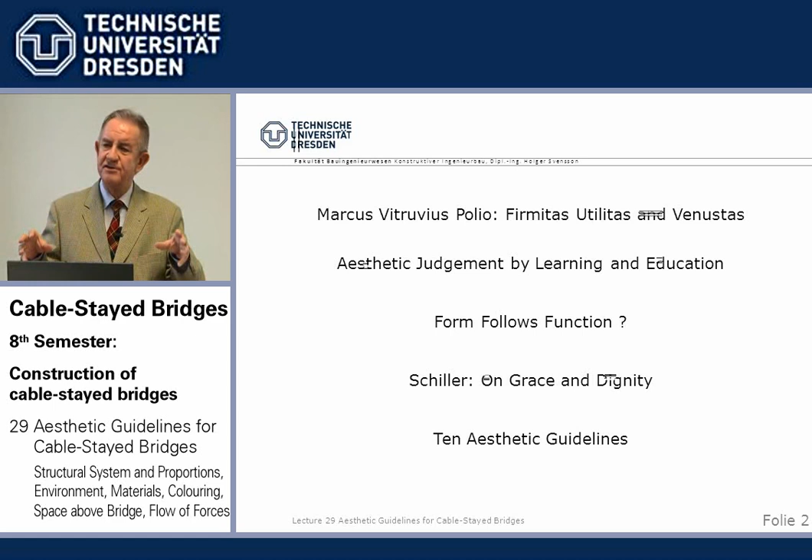And he comes to the conclusion that a beautiful structure has to fulfill rational requirements, form follows function, as well as more felt requirements. So I like to say he combines the two considerations on a higher level dialectically. This is, I think, the answer. It must be rational and it has to fulfill some requirements from feel.

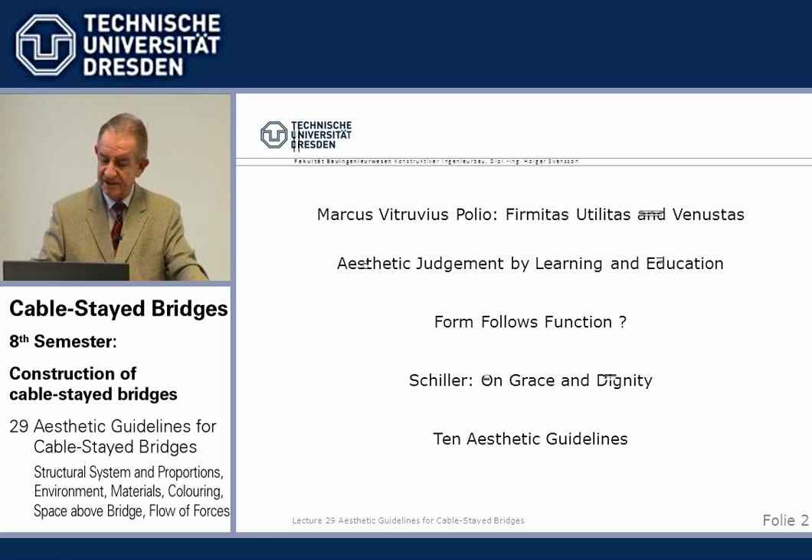We will today deal with the rational requirements, and for that purpose I have developed, or summarized, 10 aesthetic guidelines which can be used to judge a structure. It's not a recipe like a cooking recipe - thou shalt apply these rules and then you will reach a beautiful structure. No way, this can't be done.

But it can be helpful if you're sitting with a design, or looking at another design, to have a way to check various points, whether they are fulfilled. And by constantly looking and judging structures - that is what I call learning aesthetics, by being aware of what is beautiful and what is not, and why. So these 10 guidelines, from clear structural system to, I always say above all, simplicity, we will now go through with examples.

A clear structural system is a requirement so that even a person uneducated in structural engineering, when he looks onto a structure, feels there is a right flow of forces, or a layman also has a fine feeling if there is a wrong flow of forces.

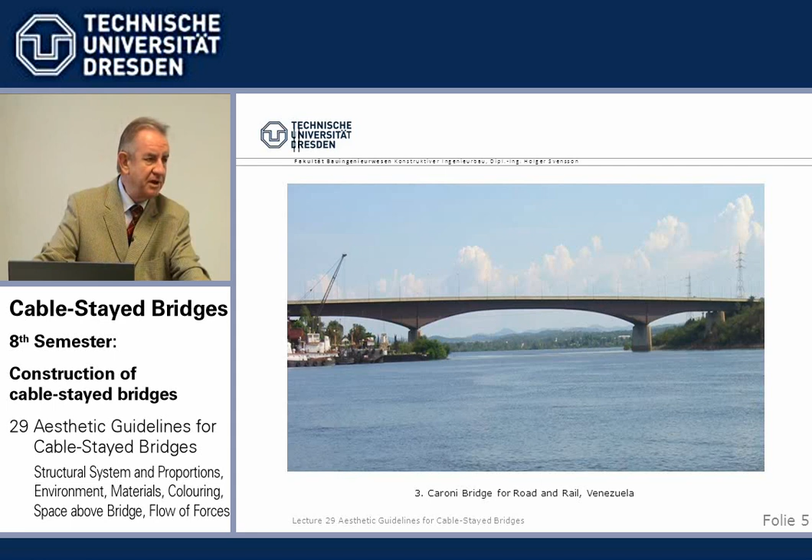So a clear structural system - we start with a continuous girder, deeply haunched. This is for road and rail, and it's very clear how the loads are transferred by bending, and where the biggest bending moments are, over the piers, there is the greatest depth, most material.

An arch also gives a clear impression. Here we see this is a fixed arch between rock slopes, and that's where the force is transferred, and a light roadway is hung from this load-bearing arch.

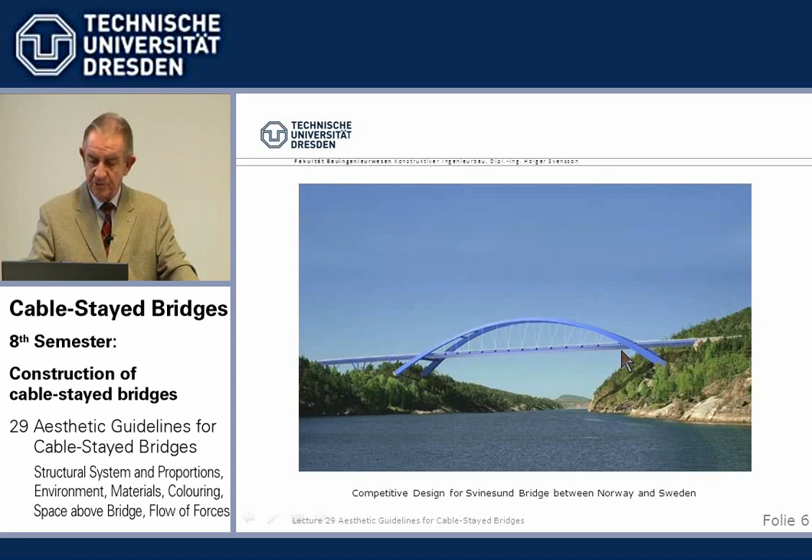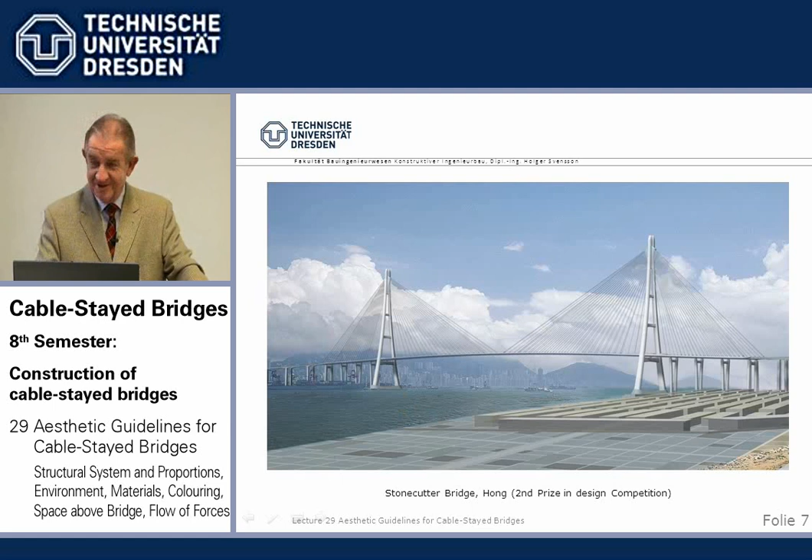A cable-stayed bridge shows a clear system. We have a light beam hung up by towers, and the connection is done by cables. This, by the way, is a second prize for the stonecutter we did - we didn't win, we were runner-up, but it still hurts. I think it's a beautiful bridge we designed there.

Of course, for simplicity, a suspension bridge cannot be beaten. The towers have what I call the washing line type - main cables hang over, and the hangers and the beam. For clarity of structural system, you can't beat it.

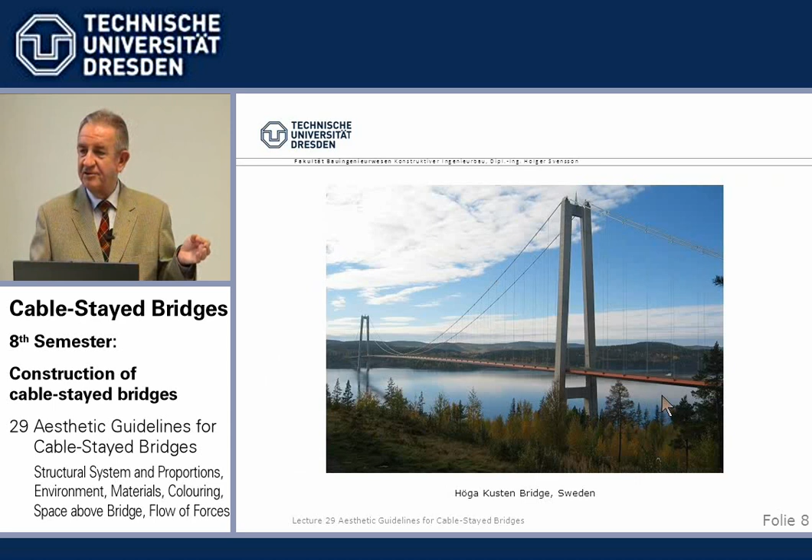The depth ratio above the piers and in the center should be close to 2 to 1. The second rule is that the depth of the beam in the center and at the end should be the same, and it should run horizontally, as a tangent, with the underside parallel to the top into the end structure. If you follow these rules—2 to 1, same depth, and ending up parallel—you will nearly always design a good looking haunched girder.

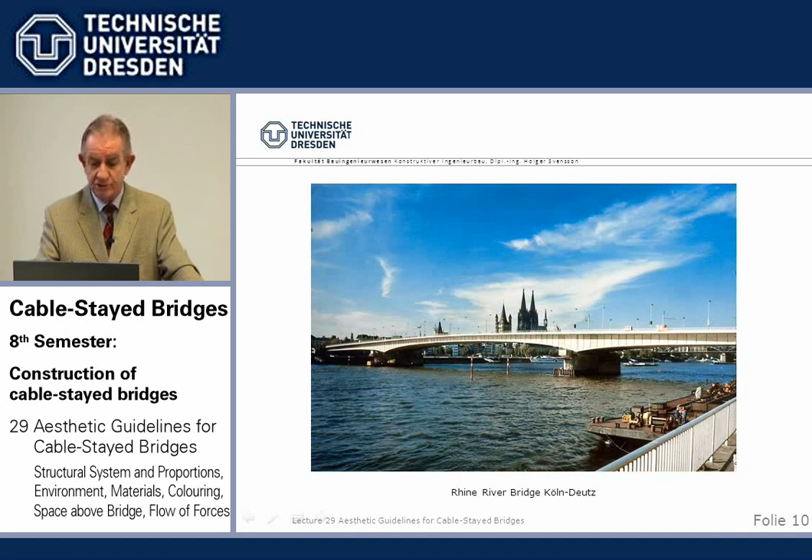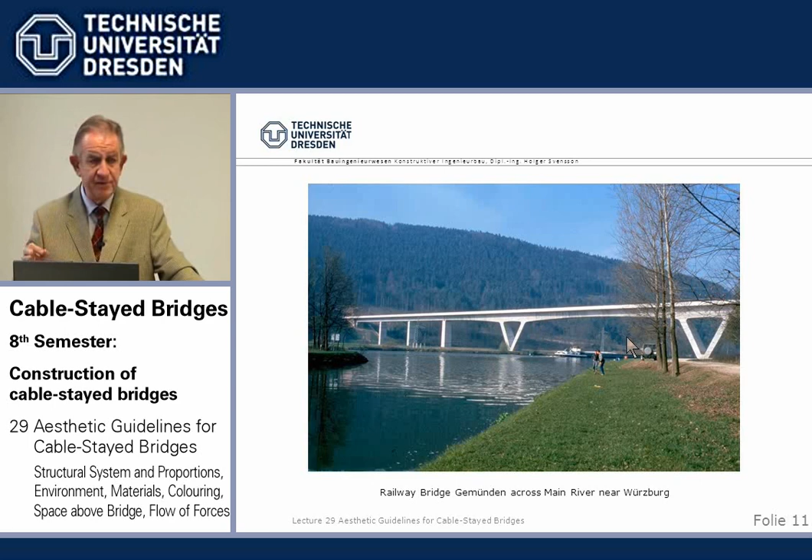An arch bridge also has simple base rules. Again we have the rule of 2 to 1: the ratio between the arch depth and the beam depth should be 2 to 1, or 1 to 2—it doesn't matter.

It can be the other way around—you can have a heavy arch which carries the bending stiffness, with a light roadway slab just hung to it. Then the arch has 2 and the beam has 1. But you must not use the same depth for the arch and the beam; 1 and 1 looks dull. You need a certain contrast inside the structure, so never make it 1 and 1—always 2 and 1, one way or the other.

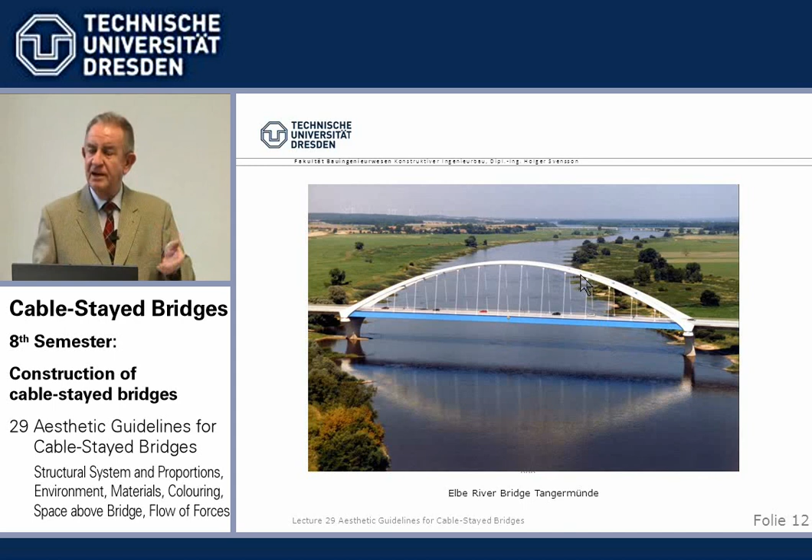Color can also help here: a dark color underlines the thickness of the beam, while a light color highlights the slenderness of the arch.

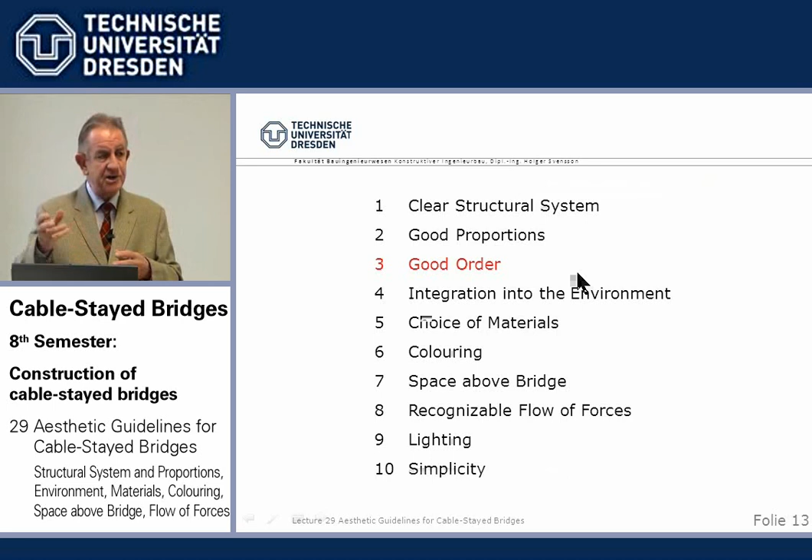Next rule, good order—very important. We must minimize the different directions of members in a structure to a minimum. Good order.

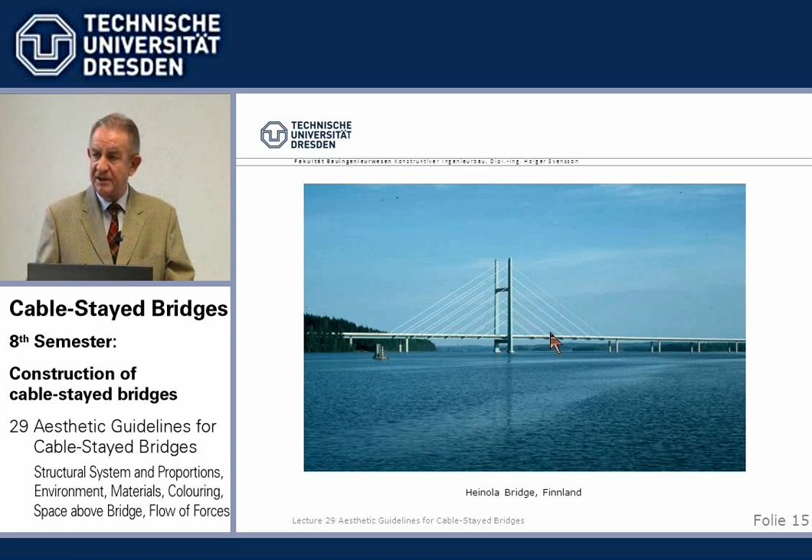This can easily be demonstrated in the arrangement of stay cables for cable-stayed bridges. The simplest way is the harp system, with cables in parallel. With only one center plane, there are no intersections at all—the simplest arrangement of stay cables you can have. Even with two cable planes in a harp arrangement, there are no visual intersections even when viewed skew from an angle. That's the big advantage of the harp arrangement.

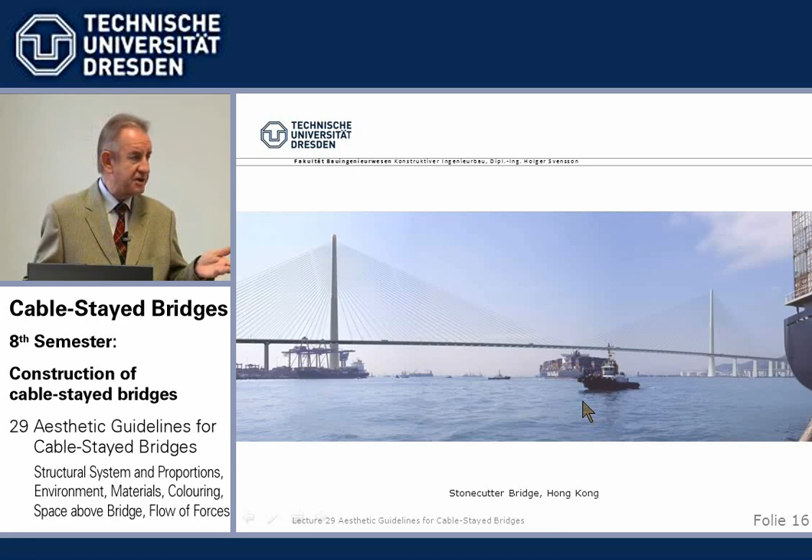Now we come to the fan arrangement, which as you'll remember is a little more economical—it needs less cable steel and less bending in the tower, so it's the usual system. With just one central plane, like here for Stonecutters in Hong Kong, there are no visual intersections of the cables, and it looks very orderly.

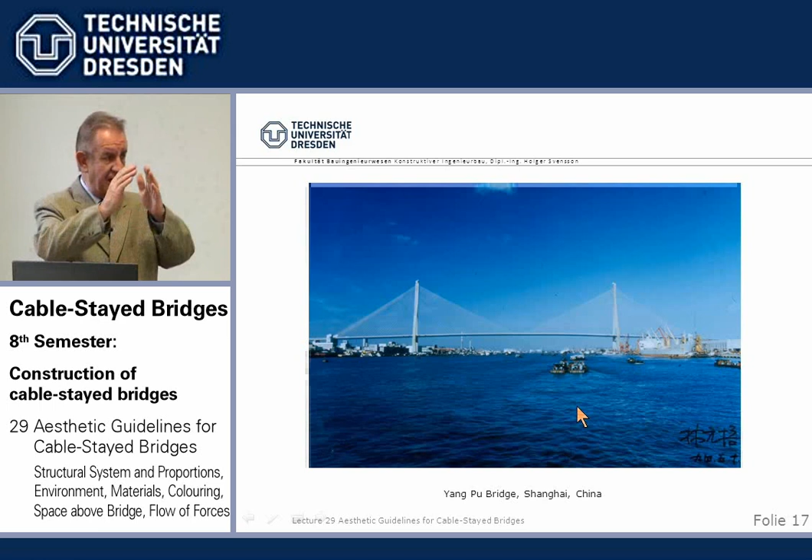However, with two cable planes in a fan arrangement, we get visual intersections between the stay cables when viewed from the side. This can be mitigated first by using an A-tower, because then the cable planes at the top are very close, as is the case for Yangpu, and intersections become fewer. Secondly, as Professor Leonhardt used to point out, with many stay cables, like at Yangpu—which was a world record in 1993 at 602 meters—the many cables appear like a veil, ein Schleier, and in this veil the intersections somehow disappear.

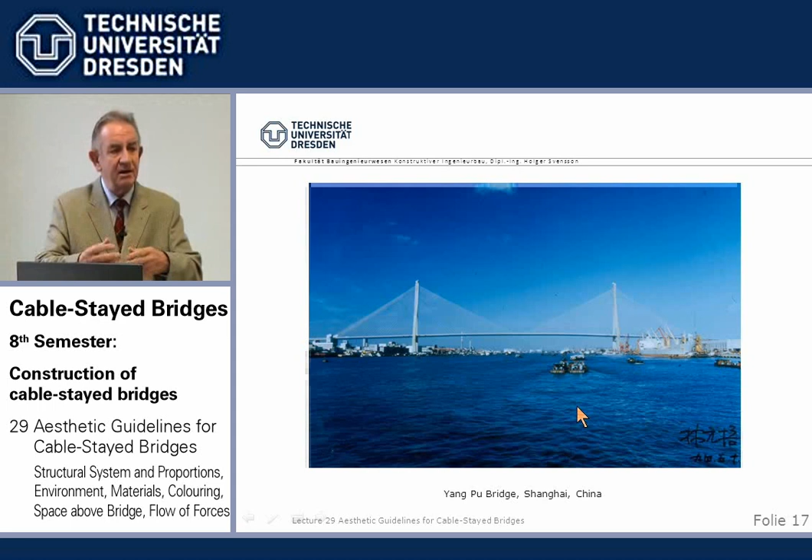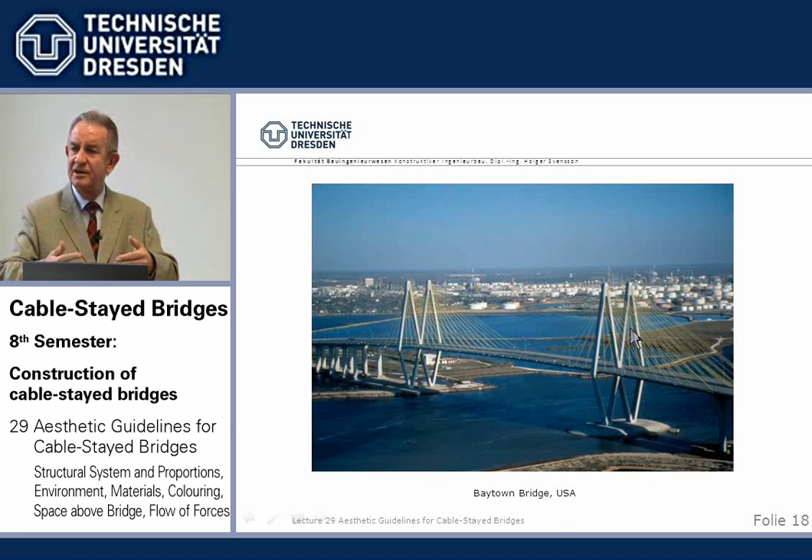Four planes of stay cables we used for the Baytown Bridge, because we needed two independent beams for each section of travel. So even here the towers are designed as simply as possible. I don't think you can design simpler, except for a pin, which we didn't want—you can't design simpler A-towers than we've done here, with constant wall thickness and all that. The repetition gives an impression of order. The four planes of cables have the problem of visual intersections that cannot be designed away, but if the bridge is big enough and we have many cables, we approach again this veil impression.

Integration into the environment is very important. If you have to design a bridge, you have to go to the site. If you design especially a major bridge—but really any bridge—just in your office, it's unprofessional. You have to go to the site and find out what is the special feature of this particular location. There normally is one, maybe not easy to detect, and you can only find it if you're there. So go to the site before you start the design, to find the special characteristic of this site, so the bridge can be integrated into this particular environment.

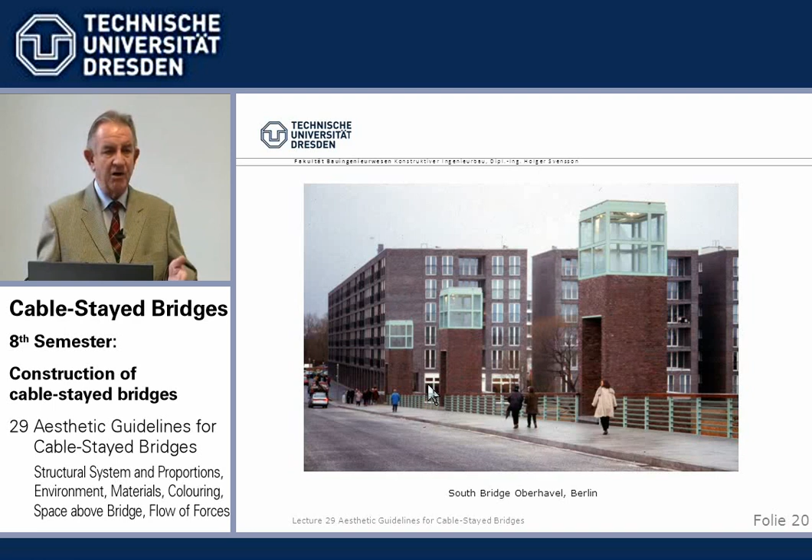In this case, South Bridge Oberhavel in Berlin, the buildings in brownstone were existing when we had the task, together with the excellent architect Professor Walter Nöbel, to design a bridge here. As a result, we took up the piers on the side to support a special lighting system, since it's mainly for pedestrians. In the end, it looks as if the buildings and the bridge were designed together, mainly through the use of the same brownstones for these prominent pier extensions as used in the original buildings. That's a good example of how we can integrate into the surroundings, in this case by use of the same material.

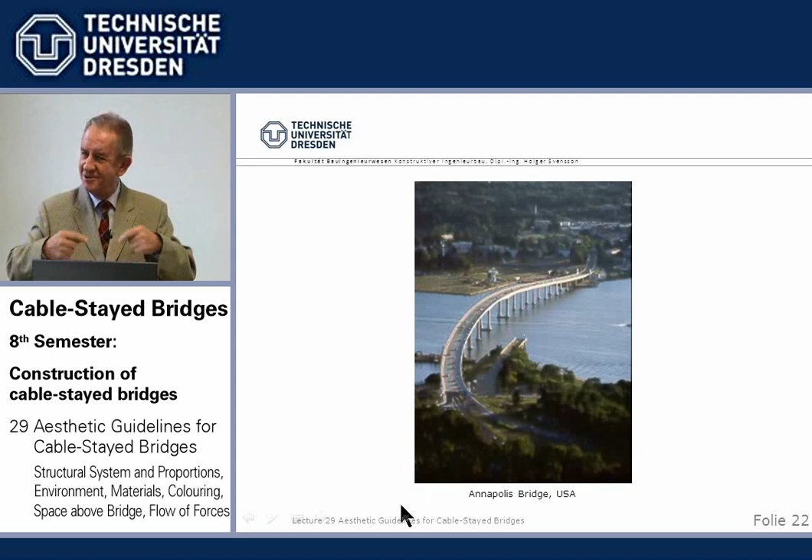We also have to respect the surroundings. Annapolis, as you may have heard, is a city in the northeast of the US. There is the famous Naval Academy from the beginning of the United States, located right there. So there was one of the few design competitions in the US to build a bridge—there was an existing one which had to be removed. We were the only ones entering with a very simple bridge, which we think was well designed. All the others had load-bearing structures above, be it arches, cable-stayed bridges, things like that—all not necessary. These spans were good enough, so by respecting the Naval Academy in the back and designing a subdued, low bridge with some aesthetic considerations, curved and so on, this leaves the Annapolis Naval Academy in its own right. Thanks to these considerations, we won the competition. Myron Goldsmith, a quite famous architect in the US, was one of the judges, and he and others saw it exactly the way we had designed the bridge, so we felt understood.

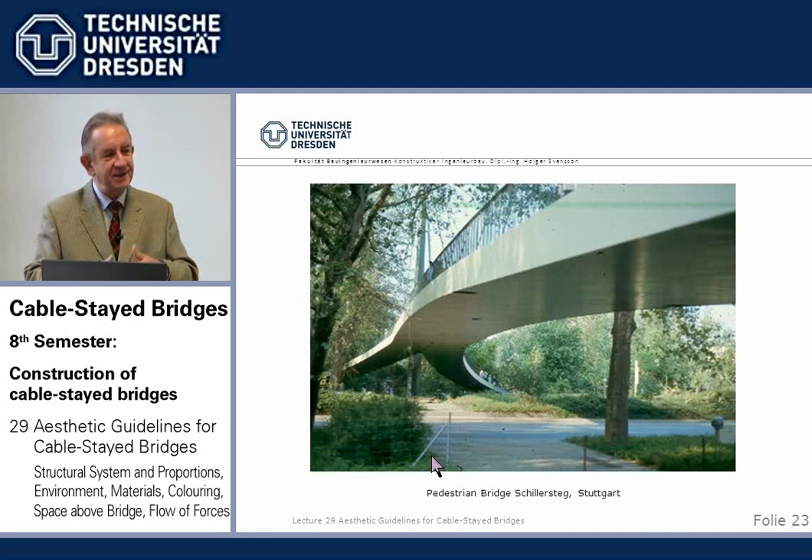Another nice example is in Stuttgart—one of the very early pedestrian cable-stayed bridges, around 1960, across Schiller Street. Before that, you crossed the road on level, and there were two natural paths bifurcating into the park, so this bifurcation was taken up in the bridge design. One could have done it straight, but no—the idea was to follow the environment. I crossed over last week when I was in Stuttgart, and it fits in a very nice way between the parks, so that's another way of fitting the environment.

Choice of materials can have an important aesthetic effect.

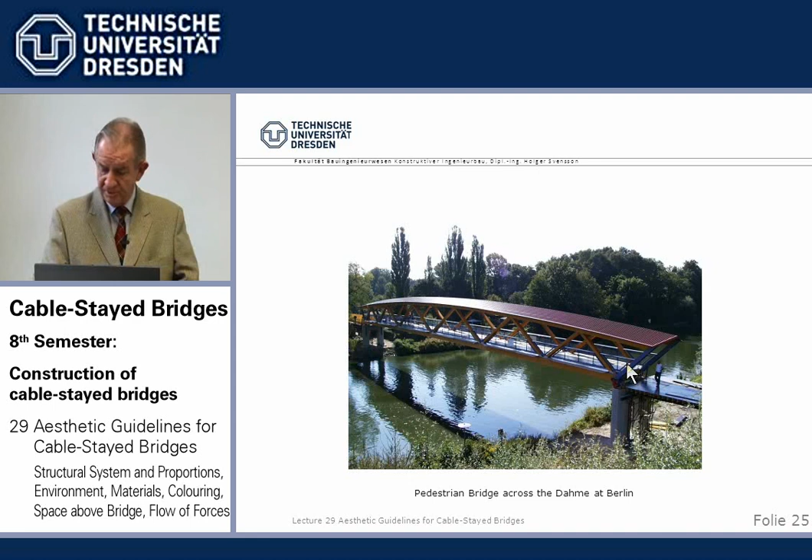I come back to the Annapolis Bridge. Also here we have a solid foundation, clad with natural stones, heavy. Then we have the uprising piers given a curved shape indicating the rising, and on top we have a lighter steel structure as the beam.

So use of materials from the solid foundations, stone-clad, to the uprising curved concrete piers, to the rather light steel structure - a typical way from heavy to light by use of natural stones, concrete, steel.

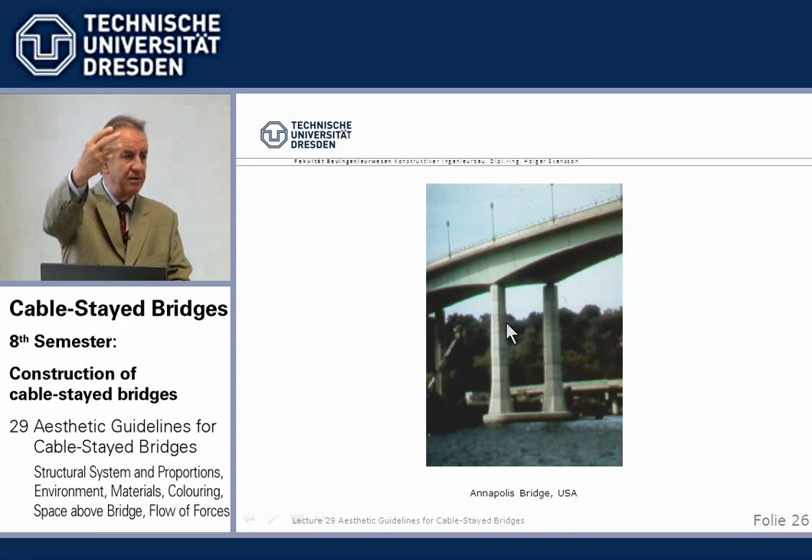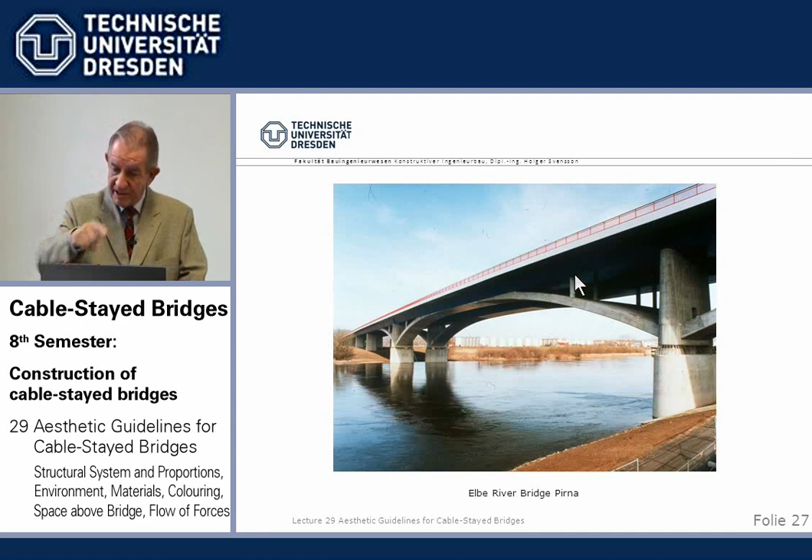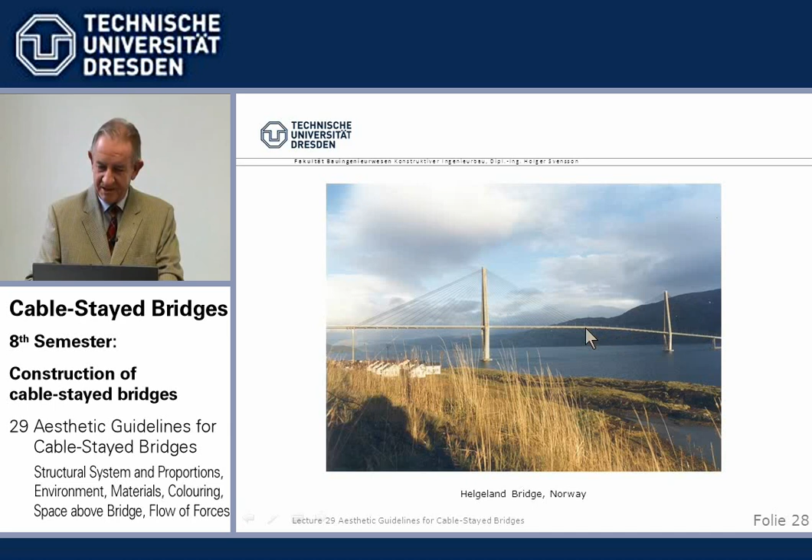This cable-stayed bridge, Helgeland, you've heard it more often, one of my favorites. We can argue that the main force in the beam and in the concrete is compression. There is some bending, yes, accepted, but the main force is compression. So what do we use for compression? Concrete. And of course, for the tension in the cables, we use steel cables.

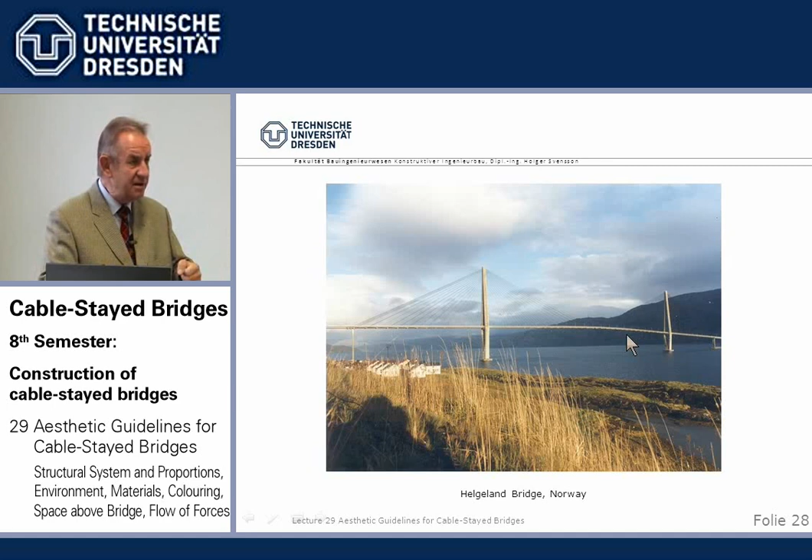We see here, you've heard it before, slenderness of 1 in 350. These concrete compression members, if supported against buckling, can be made very slender and look well. Concrete doesn't necessarily have to be heavy - you just have to use it the right way.

Coloring is an important factor, has to be used with care, but when done properly, it will enhance the view, the appearance of a bridge. Very white -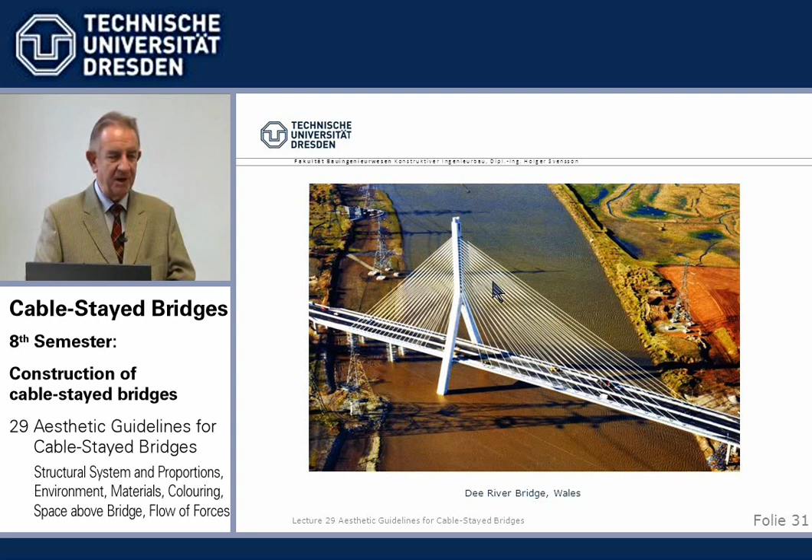So what I have used, especially for stay cables, was what we in Hamburg used to call marine white, or broken white, or off-white, or whitish - not the real white, because it becomes dirty and you see it very early. But whitish, we'll see it, I prefer. This is probably the whitest bridge I know of.

We used yellow cables in Texas. That's a decision that normally the client reserves for himself, since everybody can judge the color - they don't need to be a bridge engineer. But we were quite happy to use a yellow color here. That's Texas - strong sun, deep blue sky, and I think the yellow appears well there.

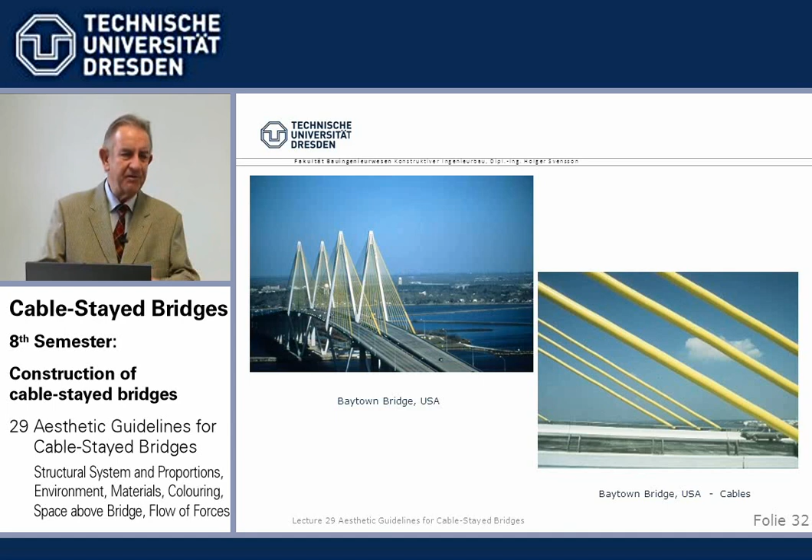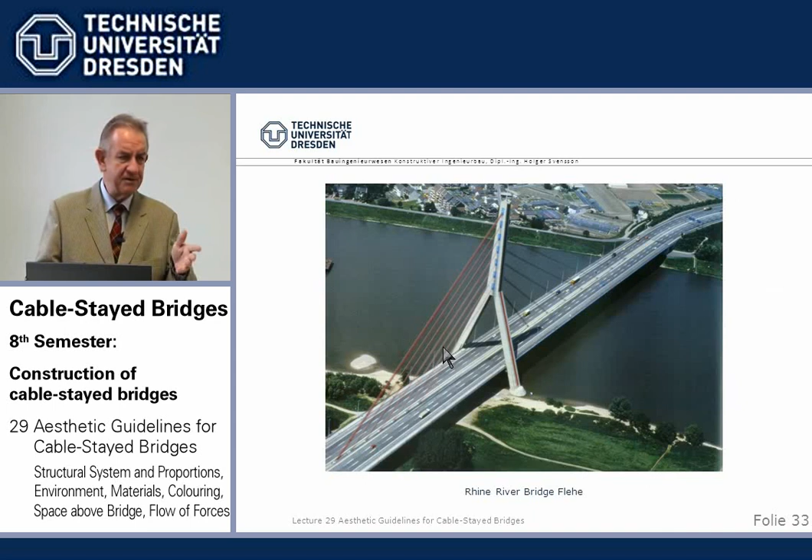Rhine Bridge Flehe. The locked coil ropes are painted, as you know. In this case, it was painted in red. The picture had to be improved, so the colors have changed a little bit. What we use is, in German, Mennige - the English word is red lead for that. It's a red which is not clear, but more like brown stone in direction. Mennige red, that's what it is. The colors are not completely right, which can be a problem.

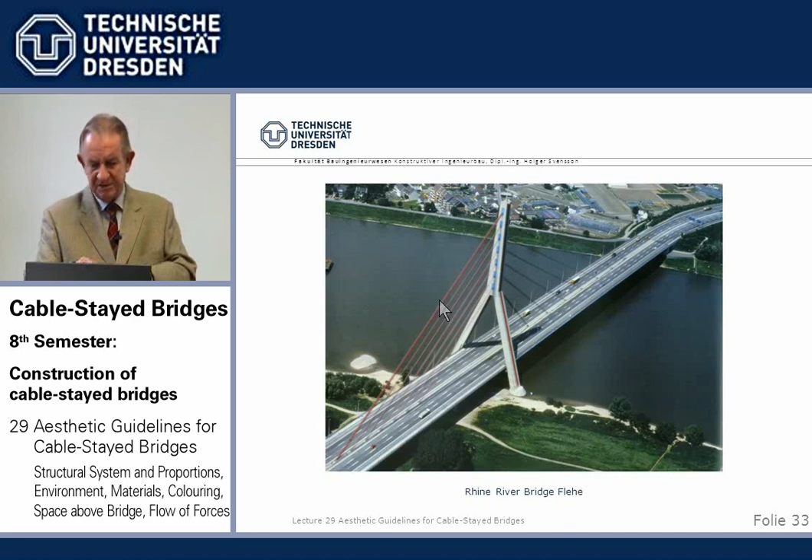Space above bridge is something which is not quite obvious what we mean by that. The point is that with most bridges, when we pass over them by car, we do not realize that we cross a bridge. Of course, if we have a tower and arch, we see it. But with normal bridges we do not recognize it, except sometimes long, high bridges, if we approach them in a curve - then we can see there's a big bridge.

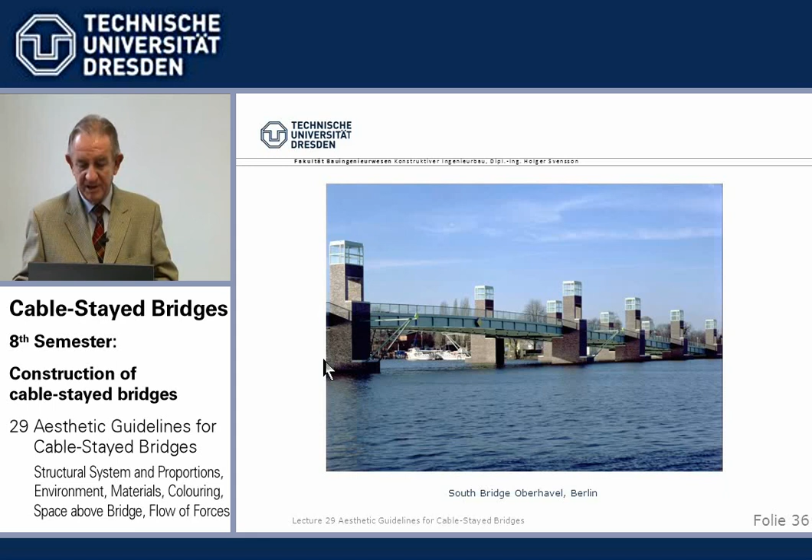That's one consideration. I mentioned already the South Bridge early on as fitting the environment. In this case, I was quite involved and know how the design developed. We had the piers underneath, and then the lamp posts and so on, and then there was special lighting, and I think the architect said, why not take this up? In effect, this type of piers growing on the sides above the bridge makes us aware we're crossing a bridge. So that was not the original purpose - there were other reasons - but it was in our mind that it's good to indicate the bridge.

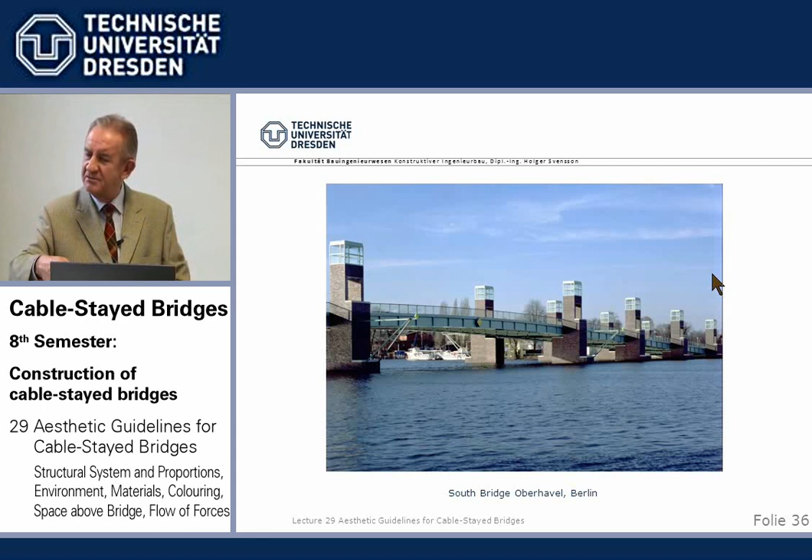Naturally, if we have a cable-stayed bridge, we have a structure above, and as a driver you will see it. A-towers, which have many advantages as I've told you different times, have another advantage in that they form something like a tent. I feel if you go through this tent you feel safe, and it gives you some good feeling, and you can recognize the cables. Otherwise, sometimes it's not possible.

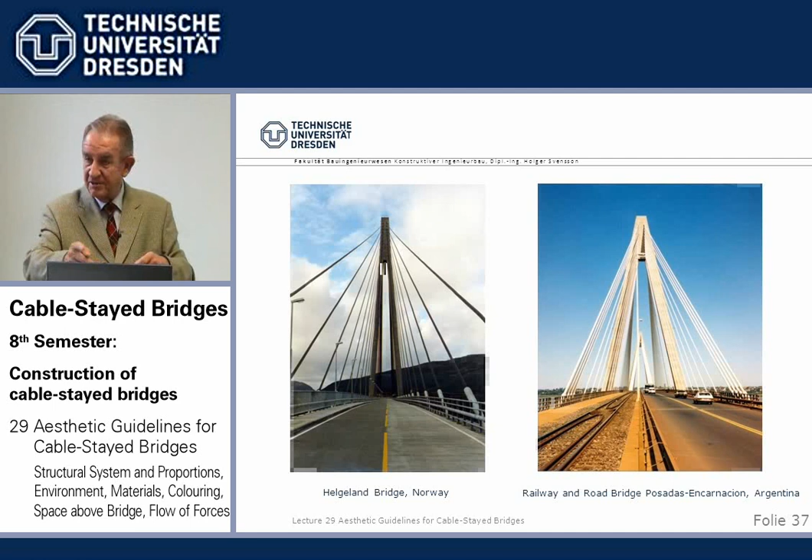Two examples - a negative example, which I normally have avoided. I've only given good examples, but I think this demonstrates it well. And if I criticize something, I prefer to do it with my own bridges or LAP bridges.

In the early 70s and 60s, the freeway Heilbronn-Nürnberg had to cross the Kocher Valley, and the slopes were considered at risk of sliding. So initially it was said piers shall not be placed in the slopes because they creep. That meant very long side spans, and Leonhardt - this was very early on when I started in Stuttgart - designed this, which would have been a world record cable-stayed bridge at 650 meters. At that time models were built; there was no computer visualization. Either you had an architect paint it, or you made models. We normally had an excellent model builder who did this model and photographed it, and that's what you looked at - it looked very nice.

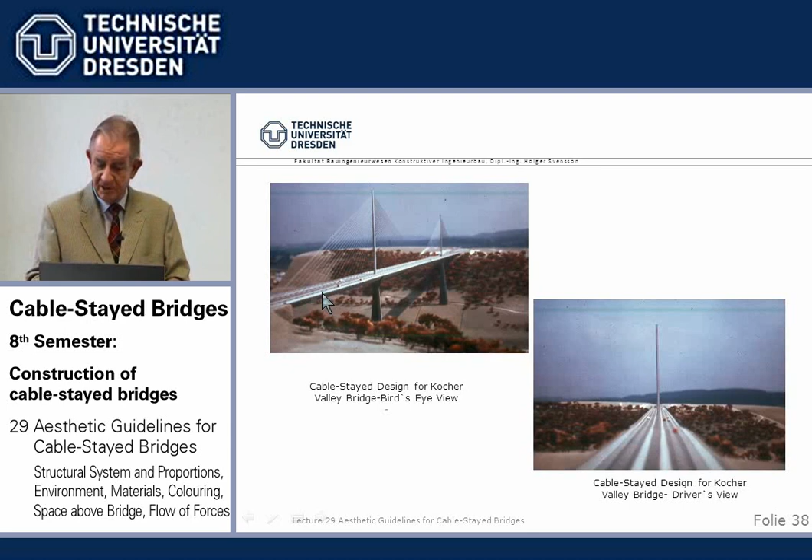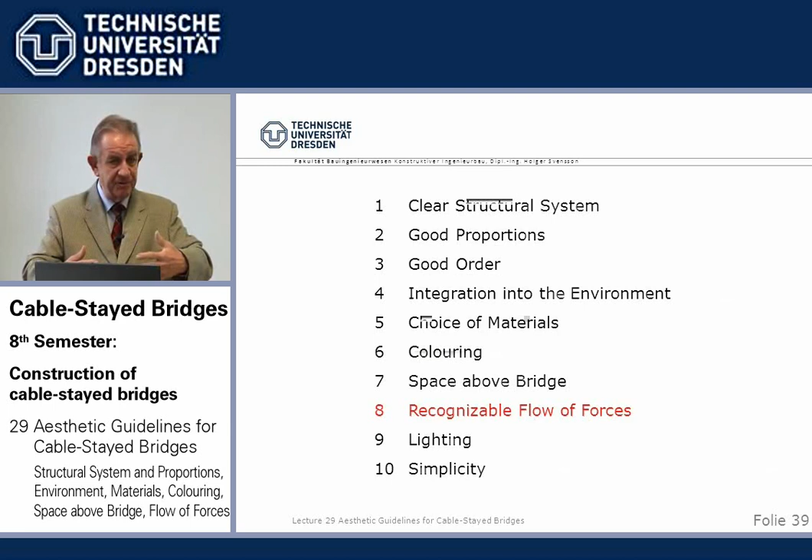I personally have never designed a cable-stayed bridge with one central plane. I've always used two, if possible, with an A-tower, because I think that is best. One reason is to have a recognizable, plausible flow of forces in the overall bridge. As I mentioned before, even non-engineers have a fine feeling for whether that's a plausible run of forces, or whether the forces are, as we say, taken for a ride.

One reasonable approach was a design we did in the US. The tower shape gives a rational flow of forces. We tie them here together, then we have to take the beam in between, and since we want one foundation again, we have to take it back. There are deviating forces where the kink in the legs is, so we take those up with a tie, post-tensioned, and we have here the tension members. So I think it's very simple, very straightforward. The flow of forces is apparent to virtually everybody who looks at it.

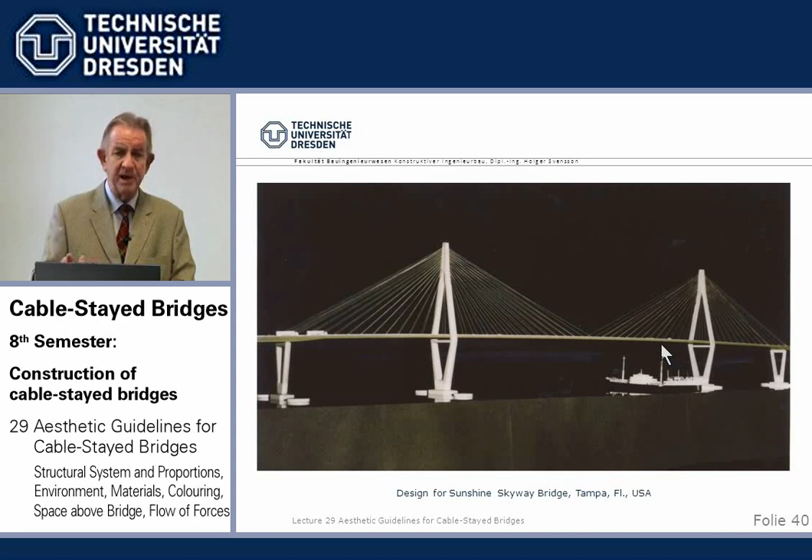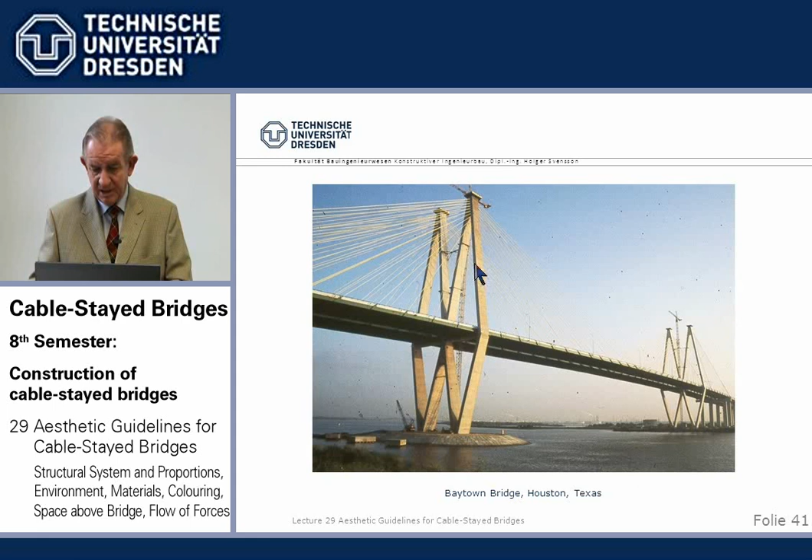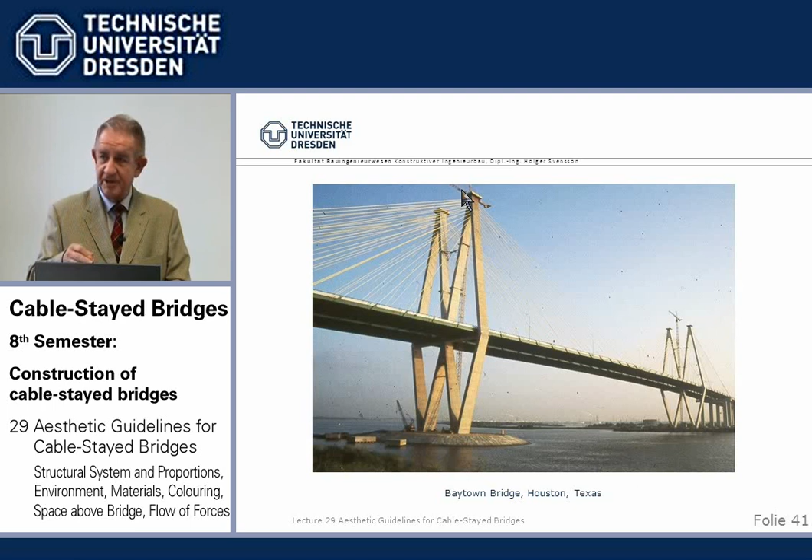With the Baytown bridge, we went one step further and said we need two towers because we need two beams. We connect them here, and it's not advertisement for McDonald's, although people in the US always said that—it's not. It's a very rational approach for transverse wind, using truss action to achieve very slender dimensions. It's designed purely from the flow of forces. It took us some time to come up with this solution, but once we had it, it was obvious—it must be done this way, from the flow of forces.

The original design had a central tower, but it was too high for the flight requirements from the nearby Düsseldorf airport. The flight safety people said it could not be higher than a certain point. It's not our design, but I know how it developed. So what was done? They cut off the tower here, but if they had kept the cables the same, they would have become very flat—23, 24 degrees—uneconomical, as I mentioned before. If it becomes too flat, you end up with something like an extradosed bridge and other odd things.

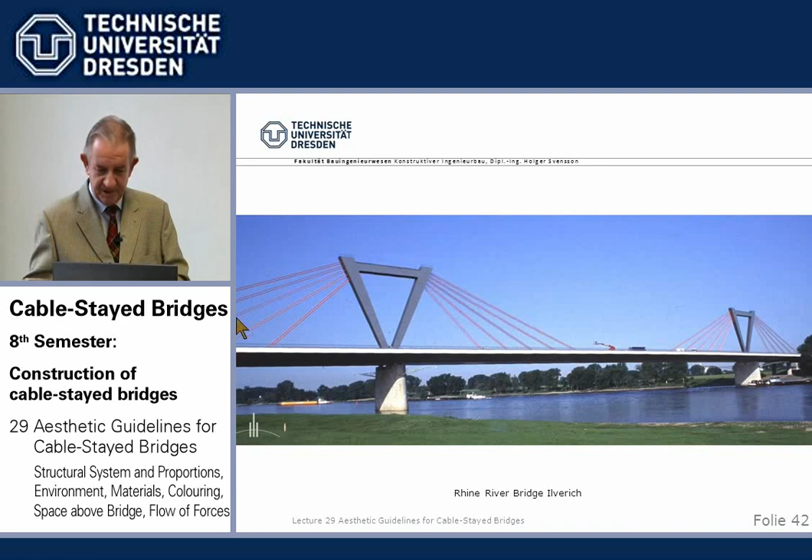So we said, okay, we want this angle unchanged, but we can only go so high—it's rather easy. We make a V in the longitudinal direction to anchor the cables at their original inclination, and naturally we need a strong tie to connect the forces here. I think it's rather obvious by looking at it, even without knowing why they cut that off. The flow of forces—a load transferred up, tied together here, and taken back—I think people can understand.

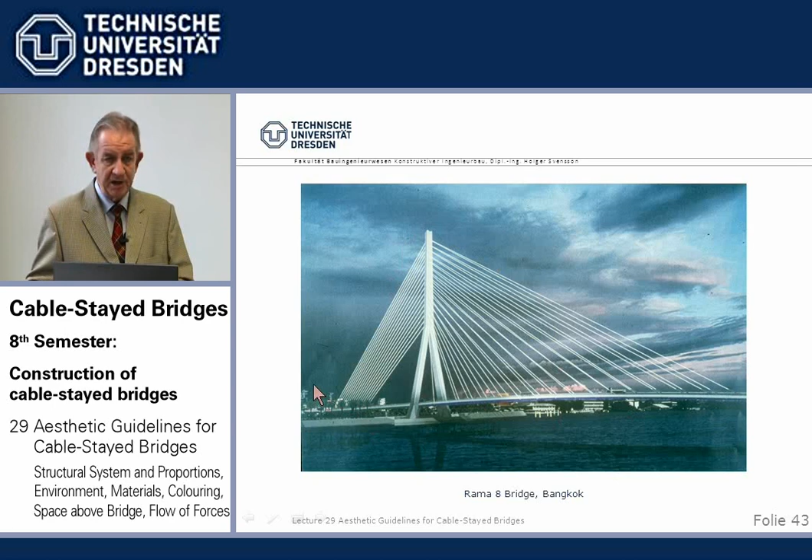Rama 8 bridge, Bangkok. It's sort of a hybrid bridge, but the concrete part is reduced to a real kentledge—Gegengewicht, or counterweight. A real kentledge is one big concrete block here and a steel beam here, and it's all taken down to this heavy weight. I think it's obvious by looking at the run of cables how that works.

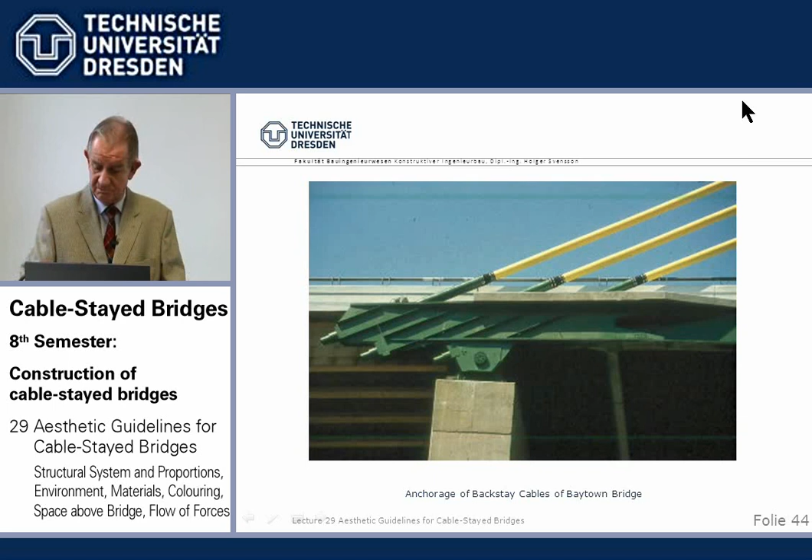Lighting can enhance a bridge, however, one word of caution: if you see a certain bridge only lit by night, it normally looks bad during the day. That's my experience. But that's only beside the point.

The Chinese people have a special feel for colors, so this type of blue lighting underneath and yellow on top is quite common. We wouldn't do that in Germany—we would make it more uniform—but the Chinese like to do it. This is Nanpu, the forerunner to Yangpu in Shanghai.

Importantly, for many years we have not used separate lights to outline the towers and similar elements, but instead use flat, uniform lights on the beam, for example, and lighting for the cables. This is a good example here.

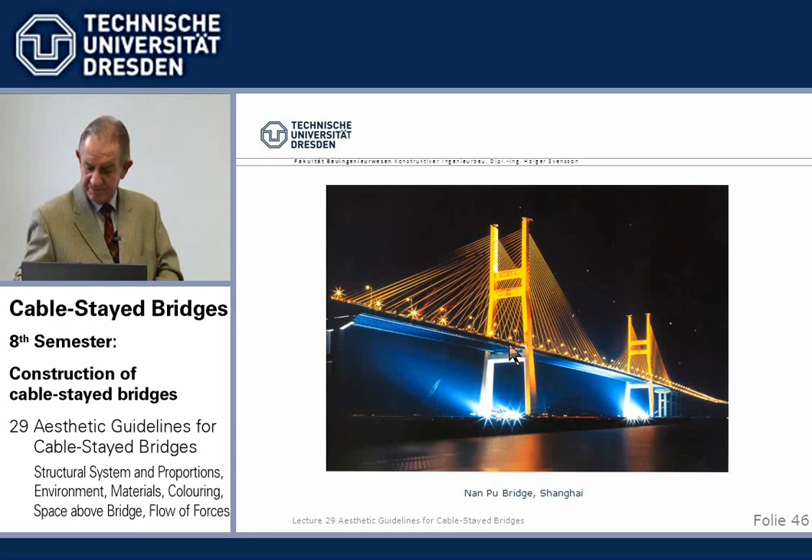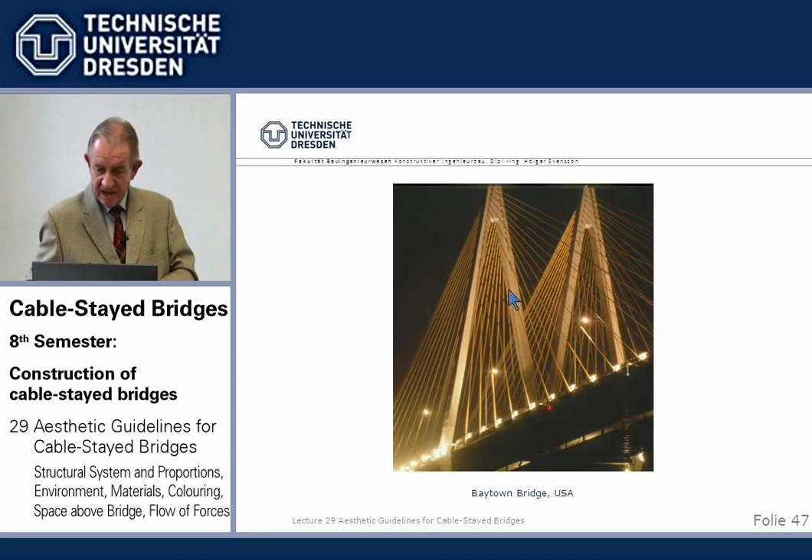Baytown Bridge has also flat lights at the beam which light the stay cables and the towers uniformly.

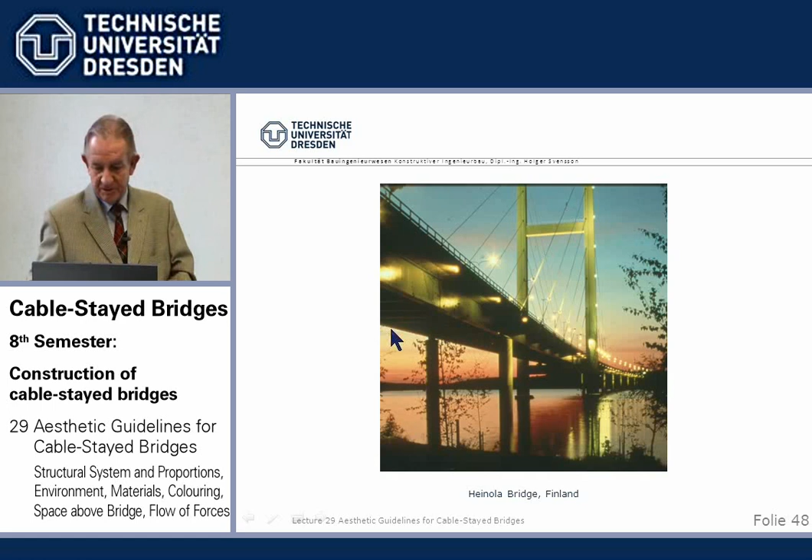Heinola Bridge during sunset, so we have the lit bridge, the sun going down, and here individual lights which, as I said, we don't need anymore, we don't use, as long as the navigational authority doesn't require them. Here it was required, they said you must have lights for the ships to show, but otherwise it's quite a nice symphony of colors.

Finally, above all, simplicity, the most important item for a bridge. A bridge design is only complete if we cannot take away anything anymore. The interesting experience is we always start with the complicated, and it takes a long time and effort to get it down to the obvious simple, where everybody says, yeah, well, that's clear, that's the way it has to be. But we never start with the simple. One always starts with the complicated and has to put conscious effort in to narrow it down to the pure form where nothing can be taken off.

Example, Weitingen Bridge. I remember well, it was early in the 70s, there were regular two-legged piers through the valley to take transverse wind, 120 meters high, freeway Stuttgart to Lake Constance. Then at the end, Leonhardt came and said, no, we don't need that, we make simple piers. You cannot beat this single pin pier for a 30 meter wide freeway cross section. That is the absolute minimum. Can't do less.

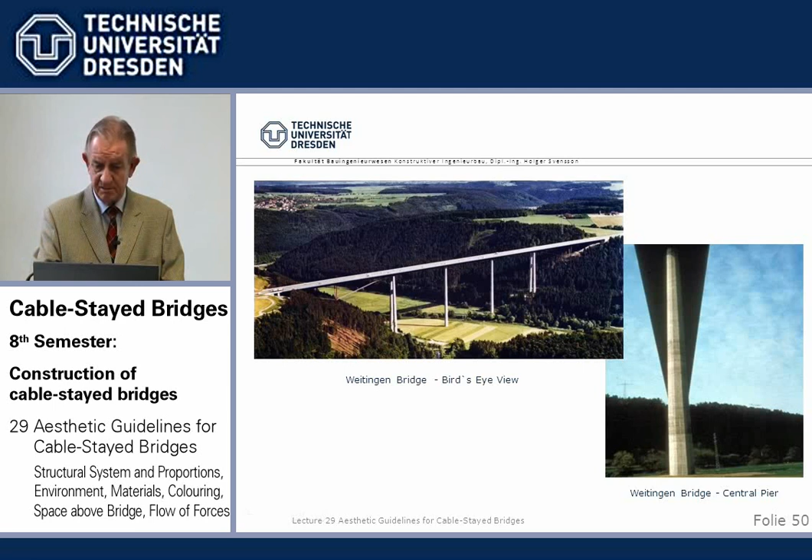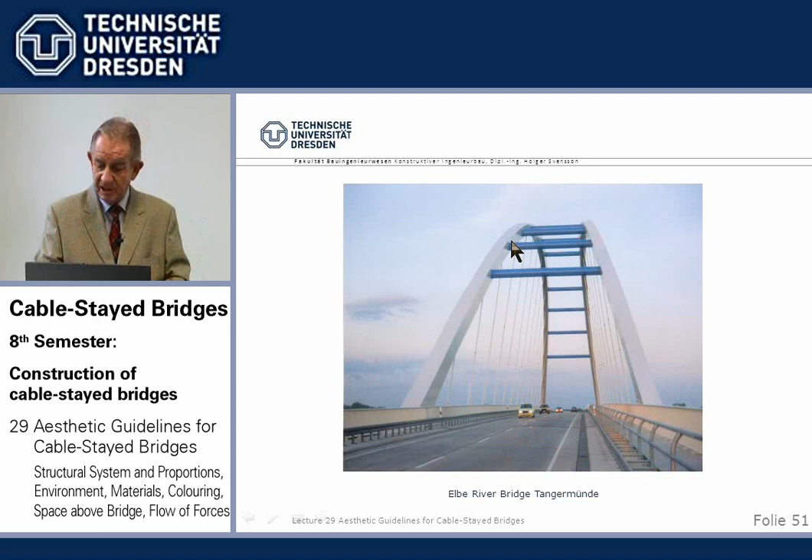Tangermünde Bridge shows we want to keep good order. We want to keep the different inclinations or directions in space of the members to a minimum. Therefore we did not use the usual bracing, which would have introduced many new directions, but used a Vierendeel system, meaning pipes in bending, a little less efficient than bracing, but fewer different directions makes a more orderly impression, and is the absolute minimum of members we need.

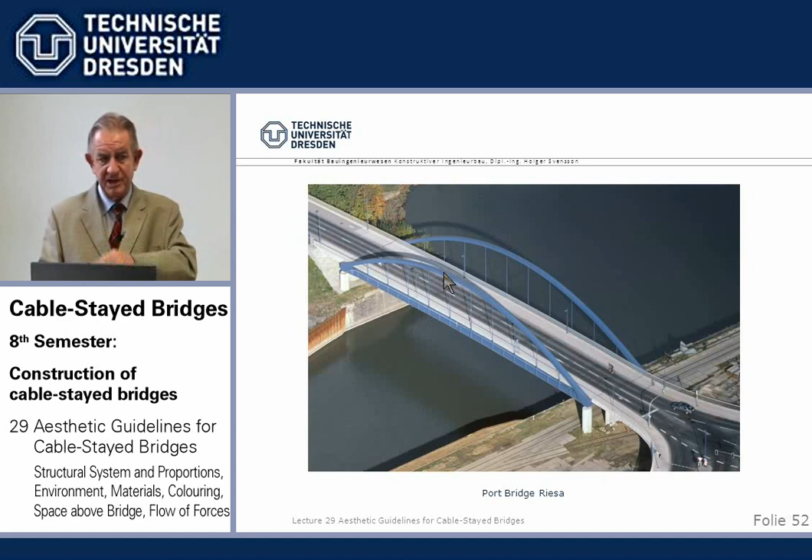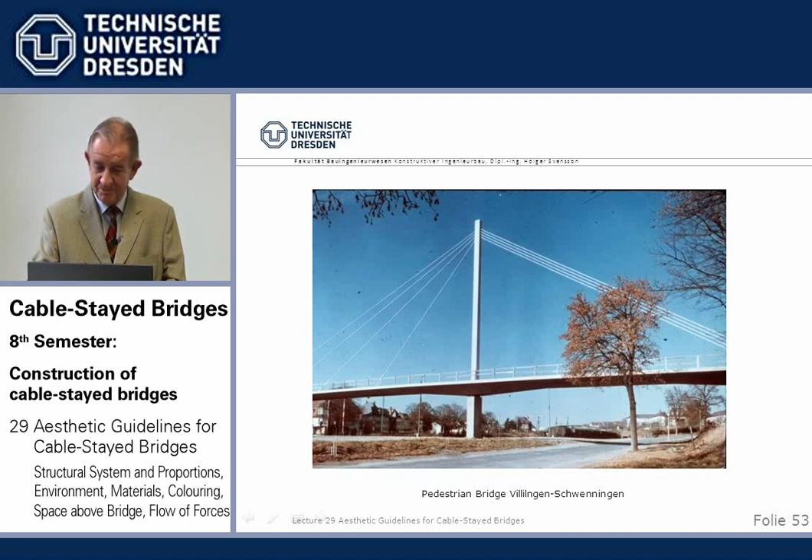Very simple cable-stayed bridge, simple slender beam, several forestays, concentrated backstays. I always use this picture because it has the railing during construction. The final railing, in my eyes, was too solid, it's 1.3 meters high and disturbs the simplicity, so I always show this with the minimum temporary railing, but then it's very simple. And this you can't beat for simplicity.

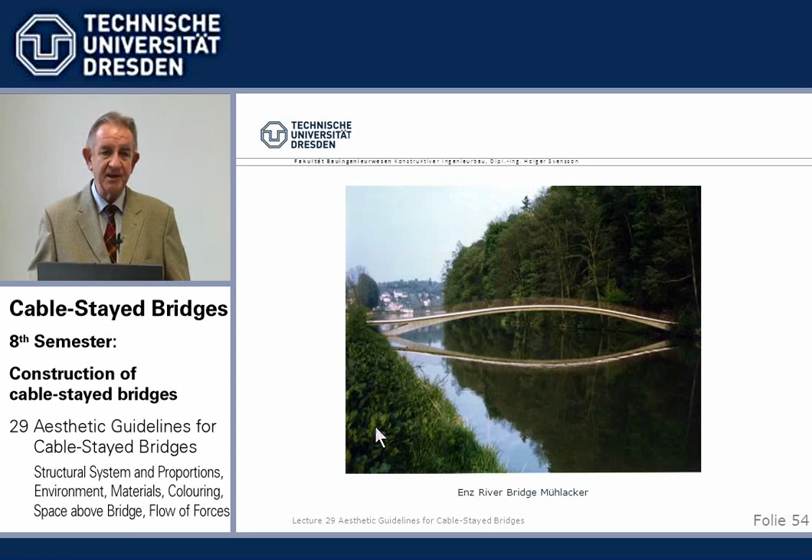Little pedestrian arch bridge near Stuttgart, which Professor Leonhardt designed. We basically have one member, the arch, and a very light reddish railing. So this, remember, is the ideal we strive for with regard to simplicity.

Final remarks. Collaboration between architect and engineer: as much as the architect is in charge of buildings and the engineer helps him with designing flow of forces, the same way the engineer is in charge of bridges, because a bridge is primarily a technical structure, and the architect advises him on aesthetic improvements. If we have a jury in a competition, there should be a majority of engineers. If not, there are quite a number of examples where designs are chosen that later will not be built because they are too expensive and have all sorts of difficulties. That normally does not happen with a design selected by engineers.

In general, the understanding of many people that aesthetics cost money is wrong. Technical and economic requirements are not contrary to good aesthetics. If one wants to put it very flatly, it's a question of using the same amount of quantity but distributing it differently. So that makes it rather easy. Aesthetics don't cost money.